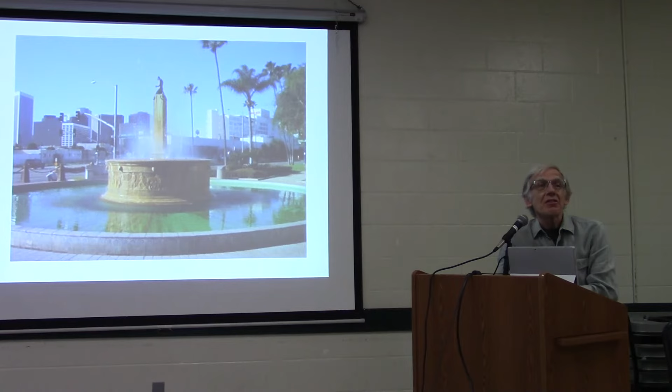And then probably the thing that most everybody recognizes is the fountain at the corner of Santa Monica Boulevard and Wilshire Boulevard in Beverly Hills, which they called the Electric Fountain as a landmark. It was built in 1930, and it became their sort of main talking point.

Now, when we ratchet forward to the 1960s, there was all kinds of activity around the world, literally 1959, 1960, 1962, in building these so-called thin shell concrete structures. This is one in Italy, at a racetrack. The popularity of this kind of form among very advanced architectural cultures was a worldwide phenomenon.

And most of them have been nominated by UNESCO for historic sites because these structures were so rare. One of the more famous architects for this was Felix Candela in Mexico, who built a whole series of churches and other structures with this kind of remarkable structure.

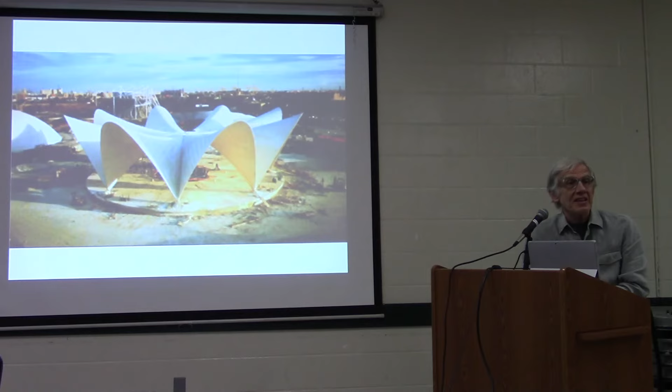The thing is that there's a structural principle here: with the right curvature, concrete can be made extremely thin and also extremely strong. The structure is called a monocoque, and you can see how thin that is. In Italy, Pierluigi Nervi was building structures for the Olympics with very similar technology.

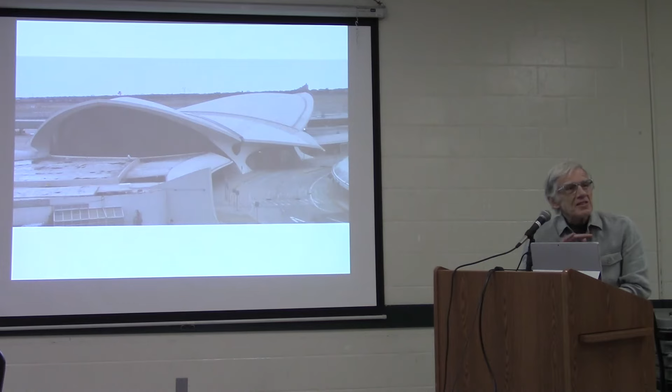And at MIT, Saarinen, a name probably many of you recognize from mid-century modern furniture and his architecture, built the MIT Auditorium as a thin shell structure, and then moved on to build the TWA terminal, also as a thin shell structure. This was all in the same period of time where the most adventurous architects would somehow twist the arms of their clients to take this huge risk and build something unprecedented.

I think it's even more to the credit of Culver City that in 1963, the school board decides to build the Frost Auditorium. This was a one-of-a-kind effort.

One can only imagine the kind of consternation on the part of the contractors and everybody involved: is it going to stand up? What's going to happen when we put it together? Is your theory going to work? Well, we all know that it worked.

And we all know that through earthquakes and all kinds of other events, this structure has endured. In fact, when we went in for structural analysis, there wasn't a crack, nor a leak. As a successful structure, there's no question that we should all applaud it.

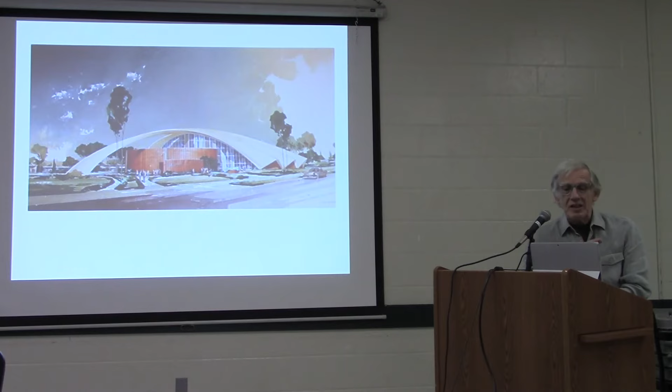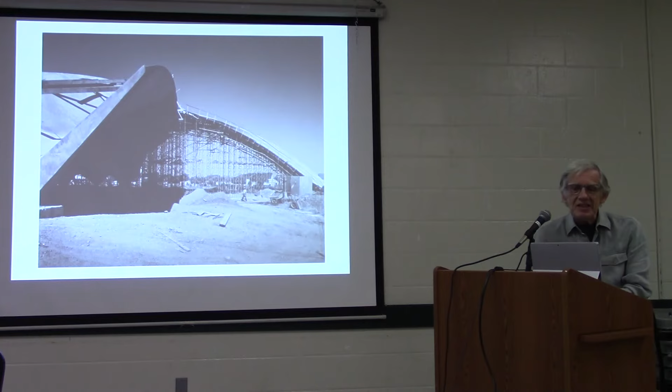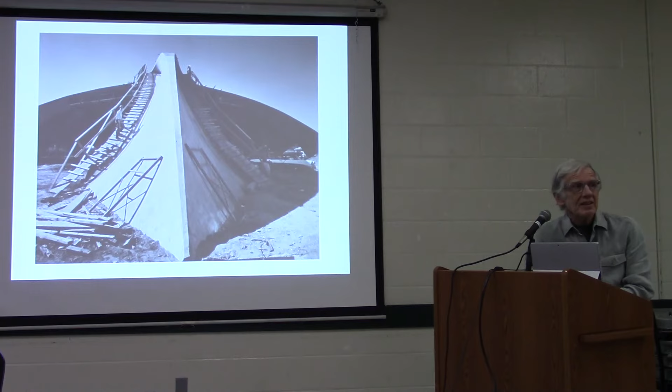We have some construction photographs here from Julius Shulman; the ones in the archive room, I think, are even better. You can see the scaffolding and the effort required to form these shapes. The majority of the shapes along the big fan were cast on earth molds—they actually molded the earth and cast the concrete on top of that, then lifted each piece up and into place. I don't have photo documentation of that, but the structure stands.

This is again a Shulman photograph. You can see in the background this sort of pleated thing, almost like a fabric that's pleated, or a Japanese fan that's pleated—and that's what gives it its strength.

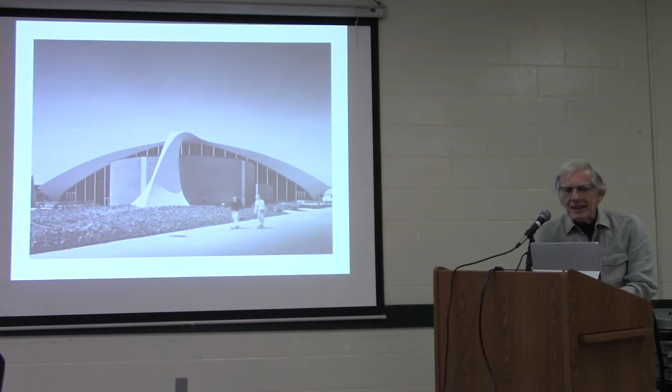Now, while the exterior of the building is very remarkable, the interior was something that was profoundly underdeveloped—in fact, I think that's an understatement. There were huge challenges in simply providing enough light inside, and those of you who've been there recognize that. Secondly, there was never an effort made to make it a place for theatrical performance. It was designed as an auditorium, which means it had a stage, it had a curtain, and not much else.

And so what transpired over the next few years—I've got to detour back to this for just a second, I got out of sequence.

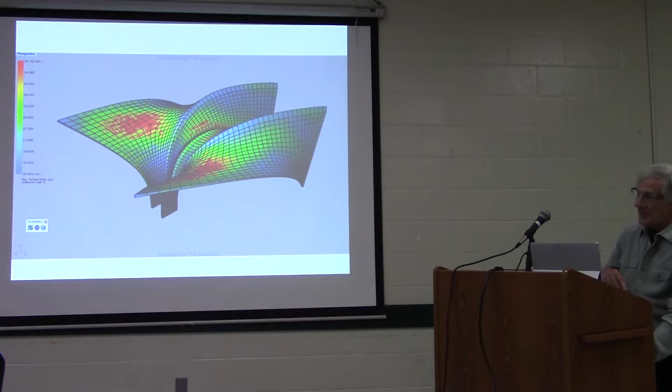The structure—just a little detour here. This gives an idea of the kinds of stresses inside the structure. Where it's red, it means it's really getting a lot of structural impact.

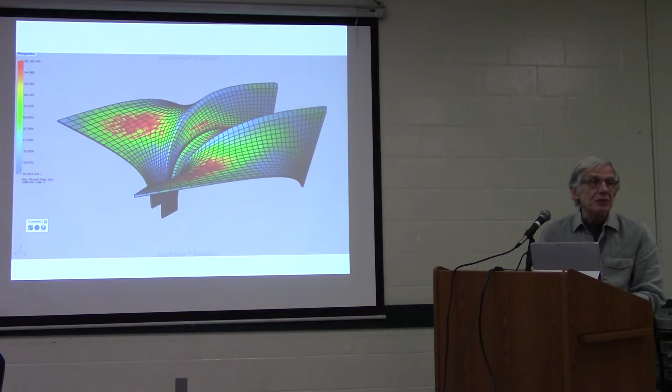Our studio, just a few years before the Frost Commission, had worked on the Wild Beast Pavilion at CalArts. These are the structural images of the CalArts building under different wind conditions and things like that. So these tools did not exist at all when the Frost was built.

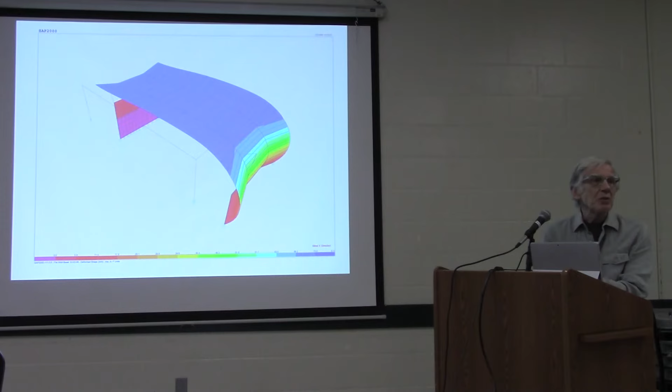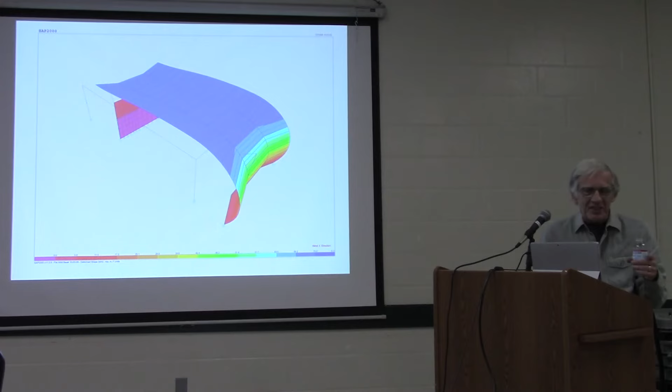And minus these tools, in today's world, we would never convince a building department to allow us to do this, right? So once again, that underscores the bravery of the guys out there. The CalArts thing is a big cantilever that moves out like that, so we're kind of inspired by the forces that created that—that's the CalArts Pavilion.

Flip back now to the interior of the Frost, with that little diversion. The sensation of walking into the building, the auditorium, is a bit melancholic, I would say, kind of deflating. The sense of celebration was just simply not something that could be accomplished within the constraints that existed then.

And for that reason, the efforts of the AVPA and the students, who were quite amazing—we met with many, many students—were nevertheless frustrated in many ways. They had this huge ambition, but the building's interior fitments kind of frustrated them.

For instance, if you went into the shop and turned on the lights, it took 10 minutes to warm up and provide light before you could do anything in the shop. So as a result, the shop just became a bunch of 'let's shove it in here and forget about it.' There were many aspects that led to a kind of lack of utility and maintenance in the building.

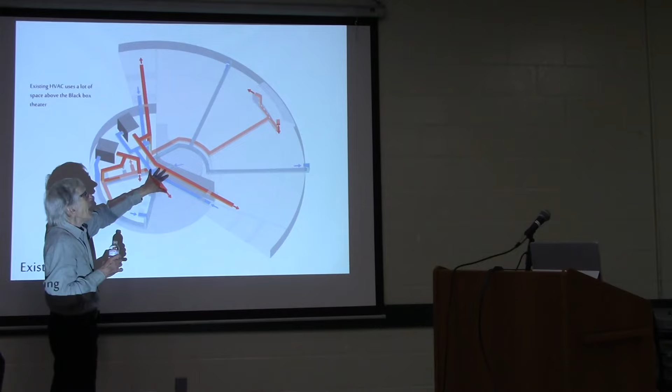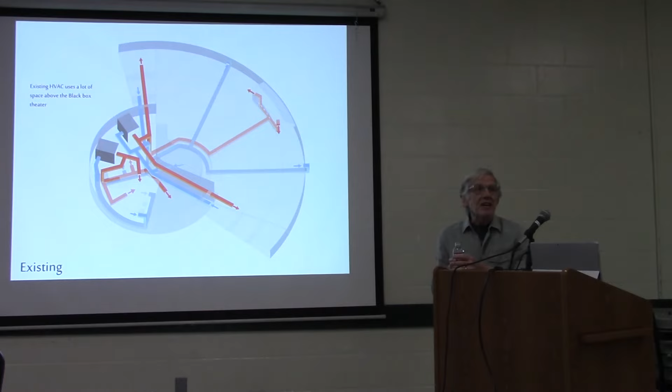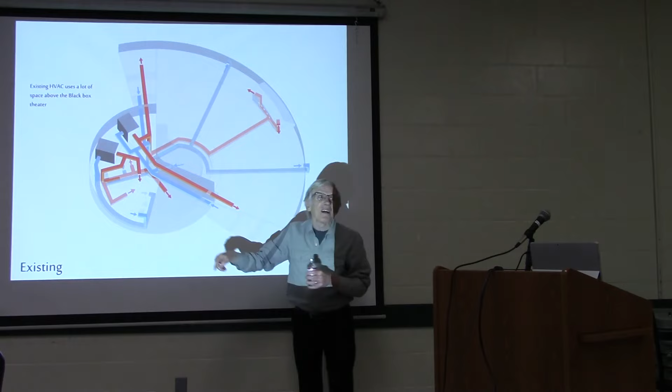The architects had decided to put all the air conditioning back here in what we call the drum, and to try to push it out to this extent, which is a couple of 100 feet, and then distribute the air throughout the auditorium. You can see that with this fan structure, all they could figure out to do was come out here

and go under the floor back here and pump out a little tiny bit of air at the back. That's the condition of the air conditioning ducts. And the one that was underground, that's it. Literally that. And it would fill up with water, and it would get moldy, and it would fill up with water, and then the rats would have at it, and then who knows what air came out of the other end of it. Really, just amazing, right?

Yeah. So to a certain extent, we can let them off the hook because in 1963, what was the level of technology available and so forth. But it obviously needed to have an entirely new distribution system for the air.

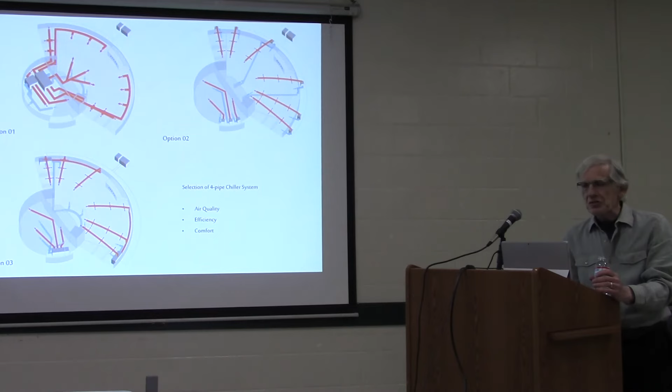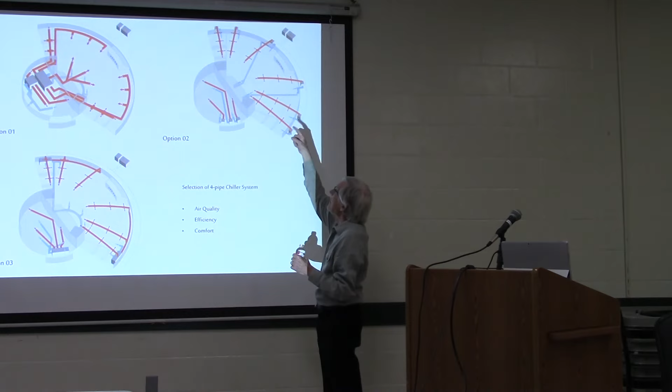So what we did was we looked at 3 different ways of pursuing that. And eventually we settled upon this one in the corner, which is feeding air into the space from a number of small units. Not so small, I mean big, but small. And by doing that, what happens? We got rid of, I'll do it with this, I can't reach up there. We got rid of all this equipment up here.

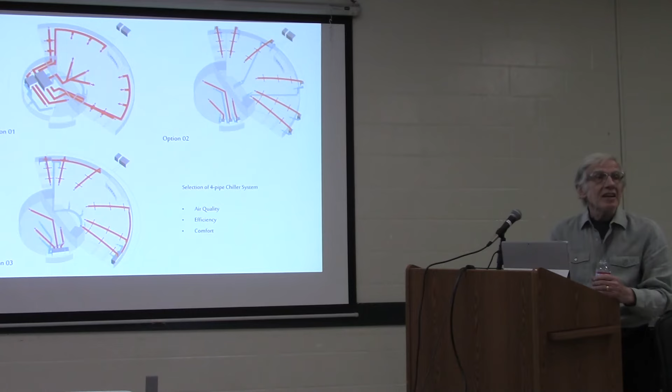And we freed up the whole second story of the drum. So as you'll see, with that move, we were able to make a high black box space by just moving all that stuff out of there.

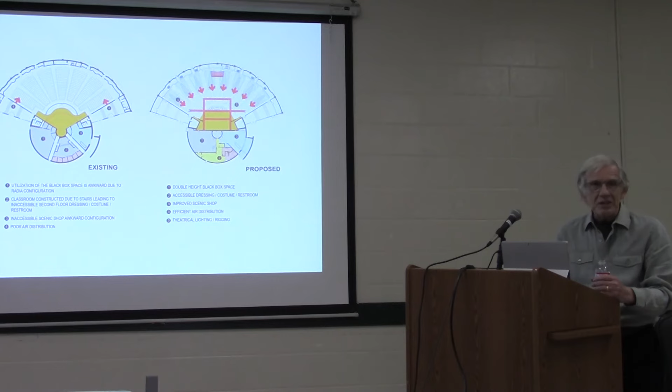So this shows you how now the air is distributed from around the edge directly into the audience from individual units. So there's almost no piping involved. And the air, when it reaches the units, can be very, very carefully controlled.

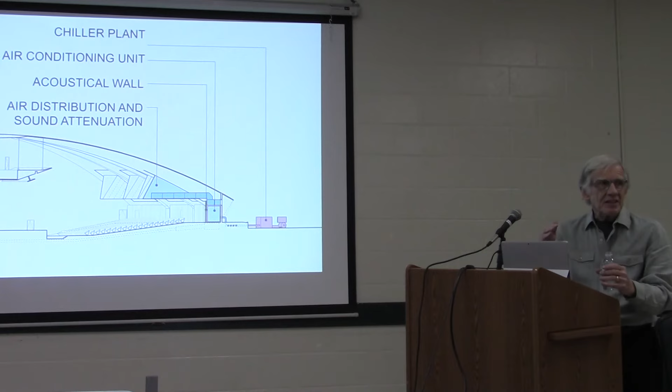And as you can see in this drawing, we also got a little bit of extra energy, both acoustically and aesthetically, from having these pipes go out and cloaking them with what we're calling acoustic attenuators, which are fabric assemblies which absorb sound and which also provide a kind of rhythmic accent which we can light around the periphery of the building. There you see them in this view, and this is a close-up of those components.

In order to accomplish this, we pump cool water around the exterior of the building and feed that into these various conditioning units. The second place that we looked at it was in terms of ADA requirements and the ability

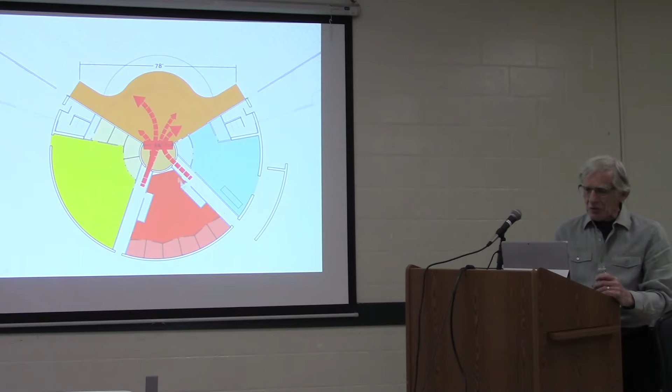of all the students to be able to use the facility. In the initial plan, you can see here, there were these 2 narrow corridors that sort of squeezed through a little tiny space here onto the stage. And that's on the ground floor. And on the second floor, there were staircases that came up to the dressing rooms, boys and girls, and the makeup room.

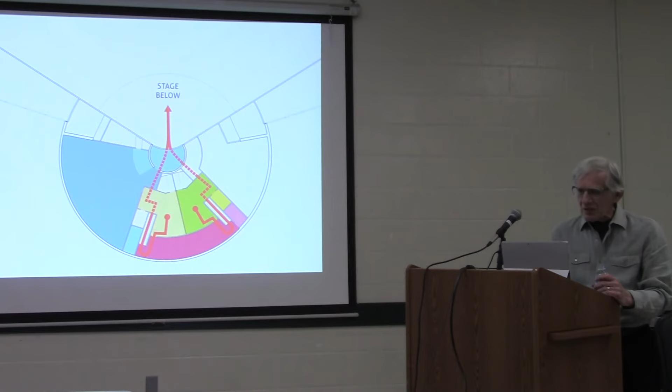So in order to get dressed and put on your makeup, you had to go upstairs. No elevator, no anything. So what we decided to do was to reconstitute this. This is how you had to go upstairs to that area. And we said, well, there are two things in this drum. One is the pie-shaped rooms, which are not ideal for a shop where you're going to build sets, and are certainly not ideal as a teaching place.

They were determined by the geometry of the building. Now, I have to tell you that in the 60s, the idea of geometry, overall, was a driving force among architects. And so by their peer groups and all of those elements, this would have been a very logical layout. But in terms of function, it was design before function.

So, these are the dressing rooms. This is the washroom. This is the costume room. So in terms of functionality, here's what happened. All the air conditioning equipment was up here, and the dressing rooms up on this second level. Down here were a couple of classrooms. And by taking the air conditioning units out of here, we were able to put a black box theater in here with a high ceiling and a catwalk around it for lighting and all of that.

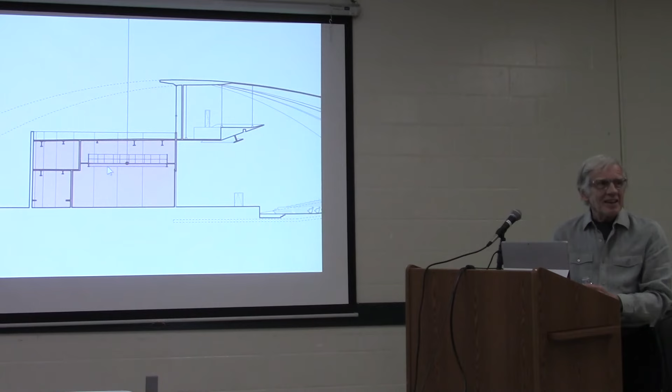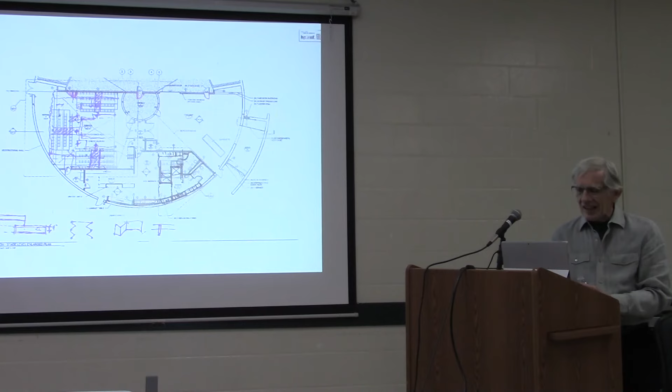And bring the dressing rooms and the men's and ladies' rooms downstairs. So it eliminated the need for an elevator, eliminated all of those functions, and gave us an ability to create an entirely new backstage area. We went through a number of iterations, you can see here, and we wound up with a configuration that looked like this. We had a black box theater, dressing room, men's and women's restrooms with showers, and very, very clean spaces, as opposed to the congestion which existed there before.

And all of this without really changing the fundamental architecture of the building, which we treated like a precious stone. We did not, at any point, want to interfere with the basic premises of the architecture.

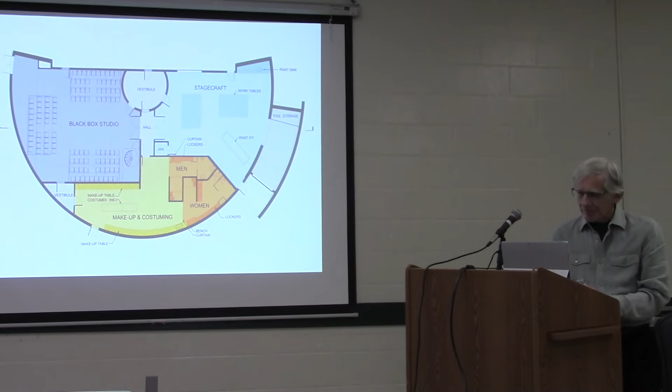So there were just these consequences of geometry which required a little loving care to make work. So we were going to look at the orchestra pit and the stage machinery, the stuff that allows us to have a full theatrical production. So once again, we looked at a number of structural alternatives without touching the roof.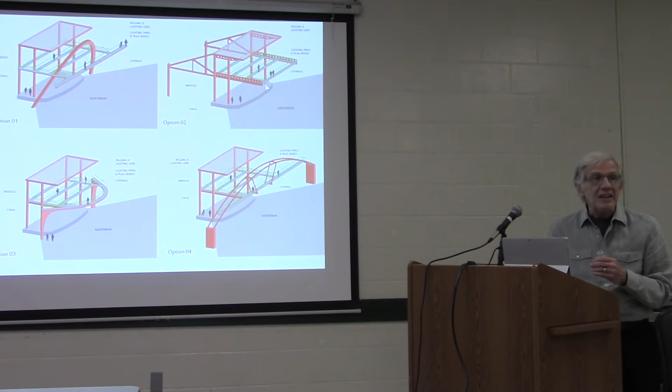So this is a kind of structural essay. What we finally came up with was this very large arch, which bridges the audience and holds the catwalk aloft. And it would be made of steel, and I'll tell you who we were looking at like crazy as our inspiration, Alexander Calder.

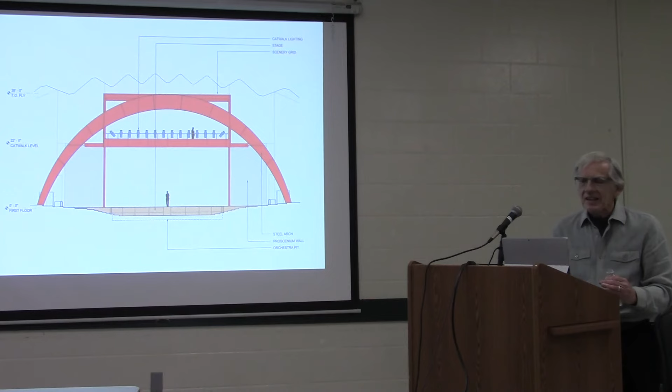We were looking at Calder with his steel structures and the geometry of his steel pieces and said, okay, this is going to be as dramatic a piece and as honest a piece as a Calder. So that was the beginning of the excursion into this.

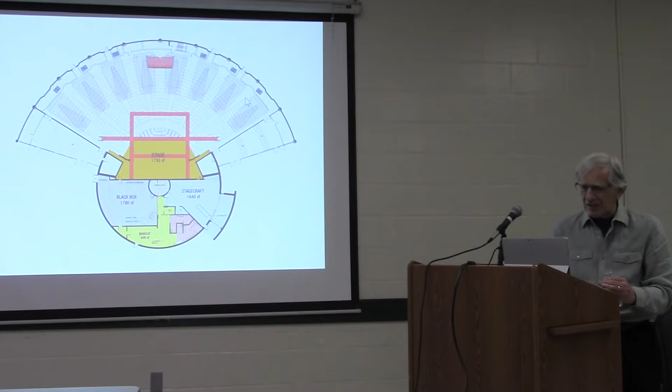You can see how far over the audience the lighting had to come in front of the stage. So here's the assembly of all the parts that we're putting into the building. Some of it inspired by what we did at the Hollywood Bowl.

It's pretty interesting when you find these various themes reinforcing one another. In this case, the big arch, the geometry of that, we felt complemented the geometry of the building as a whole. It fit nicely into the cavity of the roof, and it supported this catwalk.

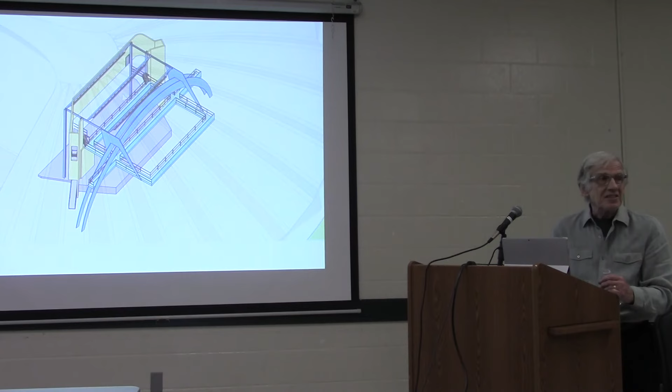So now we have a fly gallery. The sets can go up and down. In here we have lots of motors and line sets up here to pull curtains up and down, and we've got catwalks. Here's a sketch.

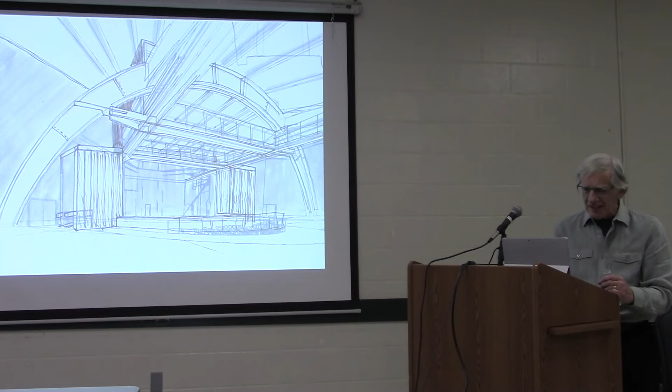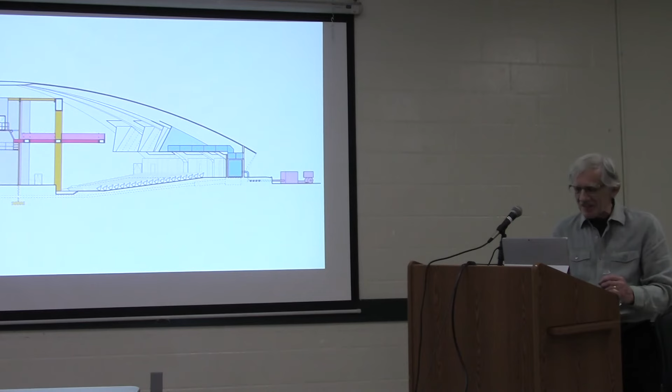And then on this side, the arch will be lit and the curtain will be lit. So your entry experience, hopefully, will create a little bit of a buzz, give people a sense of excitement. One last bit, I haven't talked about it all, but it's one of the most intriguing parts of the structure.

So here's the structure, right? And if I put some weight on it, on my hand, with my arthritic hand here, and I push down on it, it's going to spread out, right?

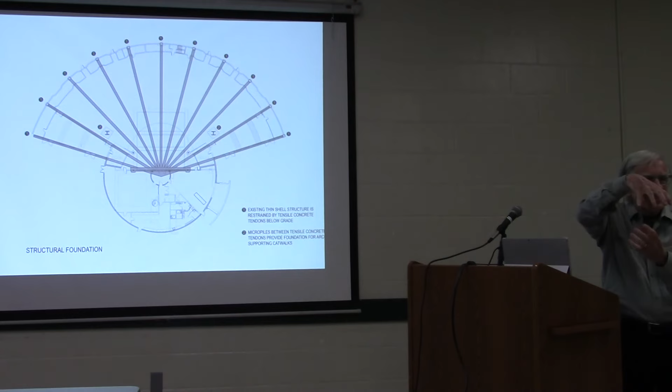So what the architects did, what Flewelling and Moody did, in their sole moment of avant-garde architecture, because they've returned to the norm, was they connect all of these with high tension rods, steel rods, which are under tension and holding this in this position. And they are under the floor.

So our biggest challenge by far was when we put the foundations down for our arch, if we hit one of those, it'll explode. And quite literally, if one of those is severed, the building will explode.

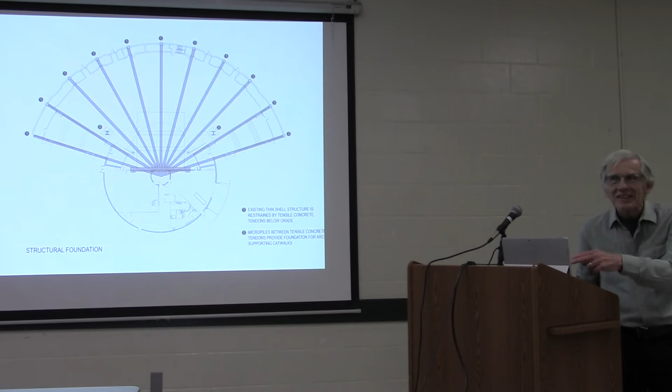So this is the image we had in mind. I mean, this is what we felt. We were like white knuckles trying to devise a structural way to get between these and to take the force of this arch coming down.

And we finally settled on a method which is called a micro pile. They're little skinny little piles, not a big one. Many, many of them surgically inserted. We'll do x-rays first, and insert those little piles, and then pour a top on it and bring the arch down on it.

And so if you hear an explosive sound, you'll know somebody messed up.

So this is the whole assembly. All the components are there.

I'm afraid some people will be dismayed because we don't have the money to reupholster the seats. We're hoping that AVPA comes along with some cash. We don't have the money to restore the lobbies. Same deal.

Your purse is talking to me. That's right, I'm sorry.

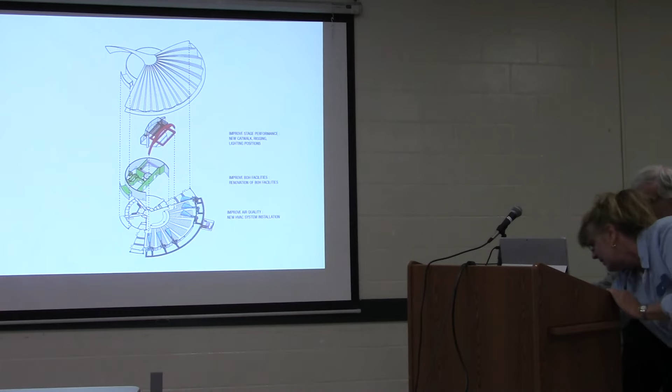Because we only dealt with the essentials. And that was our mission, that we had to make the air quality great. We had to make the theater performing so that students could learn about theatrical rigging, sets, all of that business. We had to make that great, and as good as it could be. We have state-of-the-art motors and all that kind of stuff included with that.

And we had to make the back-of-house area functional and ADA compliant. So those were the mandates. And, fortunately, we were able to squeeze all of that into the budget, which was $6 million, not a penny more. And the air conditioning alone is $2.5 million. So there wasn't a lot to go around, and we were really parsing every nickel and dime in the project.

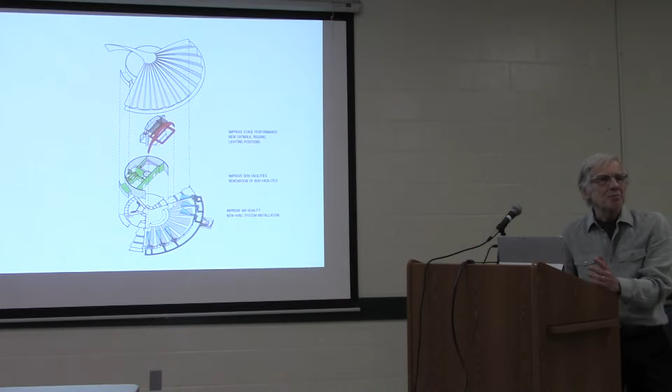So the things that we think are doable upgrades without engaging an architect or contractor even, are things like reupholster the seats. Fine.

So we think we've dealt with the essentials, and we think we've given the building new life, but it's not the end of the road. To really make it sparkle, it's going to need some additional funds, because these are just stretched as far as they'll stretch.

So here's a ghost of the stuff that's going to be in there, and here are some quasi-beauty shots of what it will be like once it's built. It's been one of the most exciting projects I've ever been involved with, including Hollywood Bowl, which was amazing.

Where did you put the orchestra? Oh, the orchestra, we cut the stage is initially curved. We cut the stage flat and put an orchestra lift in there for handicapped people. So that now it's a larger pit, and we've got a line of sight between the two sides.

Did you upgrade the sound system at all? Actually, there is a package for the sound system, which is what's called an add alternate in the budget. It's designed, all the equipment is specified, the communication back-of-house system and the monitors, again, all specified and determined, but it's outside of the budget.

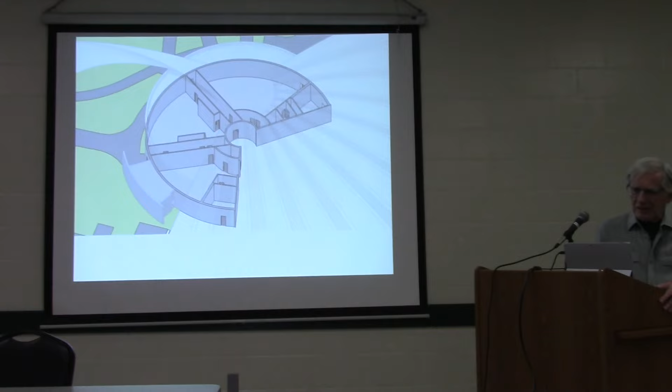I'm wondering if this is taking up both. Okay, boy, back here—okay, what was called the black box was this area here. It was cloaked in black curtains and had a low ceiling, just at this height you see in this drawing. And the shape was not very conducive to production.

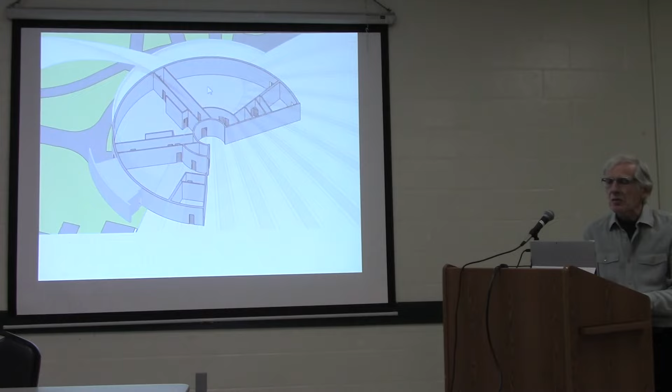And there was no—this is the shop over here—there was no practical way to build a set in the shop, get it through that door, this secondary door, this other door, and finally into there. So the proposed black box...

is here. There's a very large acoustical roll-up door at this point, and another very large acoustical door here, so we can shuttle large stage elements directly from the shop into the black box. We can also shuttle directly from the black box onto the stage. So it's like a machine back here now.

It's all designed to be 100% functional. And now we have a 2-story high space and a catwalk that goes all the way around it. So it's a profoundly different black box, which I think is going to be a really exciting performance space.

Yes, ma'am? I played in that backstage for 4 years—the stagecraft room, then it was the drama room, and on the other corridor was the music room, which is the black box. Right, so the drama room will go away. It's gone. It'll be in another building on campus. So they'll have the classes for drama in a different area? That's right, that's right.

How many people will the new black box seat? I think it's 120. It will be on portable, folding seats, so that it can be all cleared for dance rehearsals and things like that. And then the folding seats can be employed for an audience. Yeah, it's going to be cool.

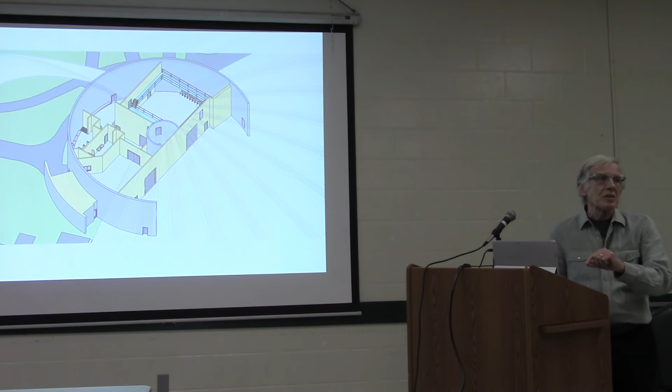In the old days, from your control booth, you had really fat wires running to every single light, and there were hundreds of lights, right? So now all of that is done where the computer actuates the light at the source of the power, and only very slender lines have to go out to the lights. So that's a huge saving, actually. A computer-controlled lighting system is less expensive than an old-fashioned one.

I might have missed it if you said it before, but when did your firm actually start work on this? I think 4 years ago.

Yeah, but there was about a year of the feasibility study, and then some period of time before the board authorized the project to move forward, to green light the project. And then it's been almost 9 months in the DSA under their review. I think, frankly, they didn't quite know what to do with it because it was so unusual, and so they were very, very particular about every element.

Any structural changes to the control room or whatever? Yes, there is a minor one. Well, you would think maybe that it was major, but in the context of everything else, it was minor. There was also no ADA access to the control room, so we've lowered the control room to the audience level, so that everybody has access to it. And the platform where the control booth was is now a lighting position for Trouper spotlights and things of that nature.